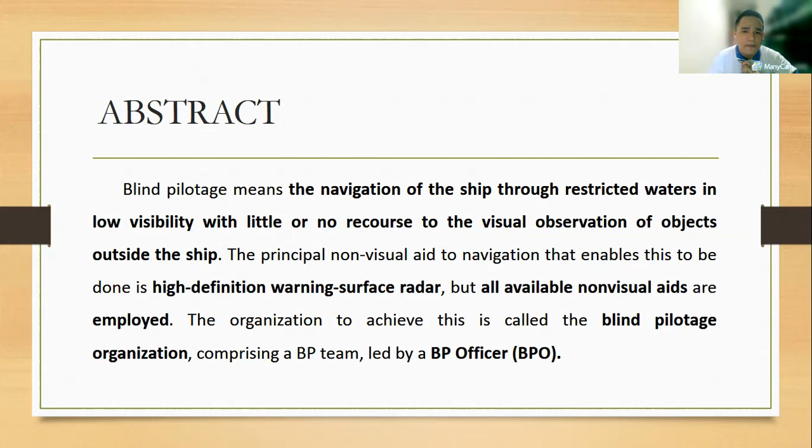Let's talk about the introduction of the topic. We're going to discuss the assessment, parallel index techniques, radar clearing ranges, course alterations, responsibilities, conduct of blind pilotage, and the blind pilotage team and duties.

After that, we're going to discuss the planning and execution of blind pilotage, which covers the principles, planning, execution, blind anchorages, navigational records, and horizontal displays.

Let's talk about the assessment of the risk involved in a blind pilotage passage. Although normally the accuracy of blind pilotage is such that a ship can be taken to an open anchorage and anchored within 50 yards of the desired place, the degree of risk involved, particularly in restricted waters, must be carefully assessed—due to congestion from shipping, or failure of radar or other vital aids.

Once the ship has been committed to her passage, the number and quality of fixing marks must be taken into account. The next topic is the parallel index technique.

This technique is the key to blind pilotage. The running of a parallel index line provides real-time information on the ship's lateral position relative to the planned track. On the chart in figure 1, as you can see on the right side, a line is drawn from the edge of a radar, like this one.

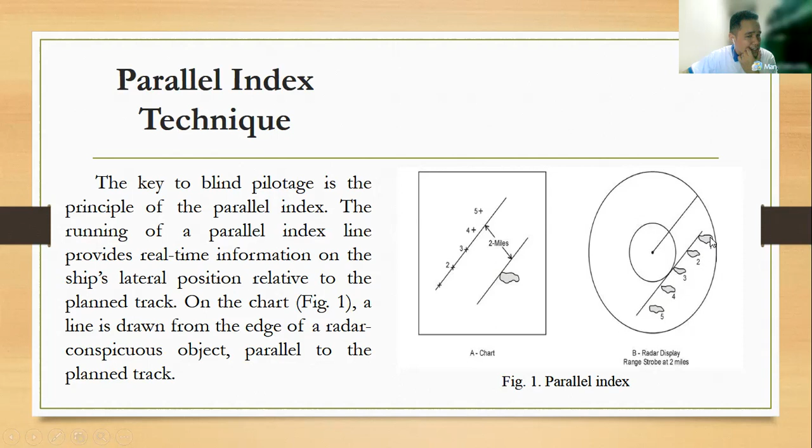It is drawn from the edge of a radar-conspicuous object, like this. This is object 1, 2, 3, 4, 5, as the ship is moving, parallel to the planned track.

The perpendicular distance, or cross index range, from the object to the track is then measured. The range strobe on the radar is set to this range, and a solid chinagraph line is drawn on the display parallel to the planned course, on a scale appropriate to the range used.

Positions 1, 2, and 3 on the chart and radar display show the ship on track at various instances over time. This is not a number of different targets—it is only one target, but it appears to move due to the time constraint.

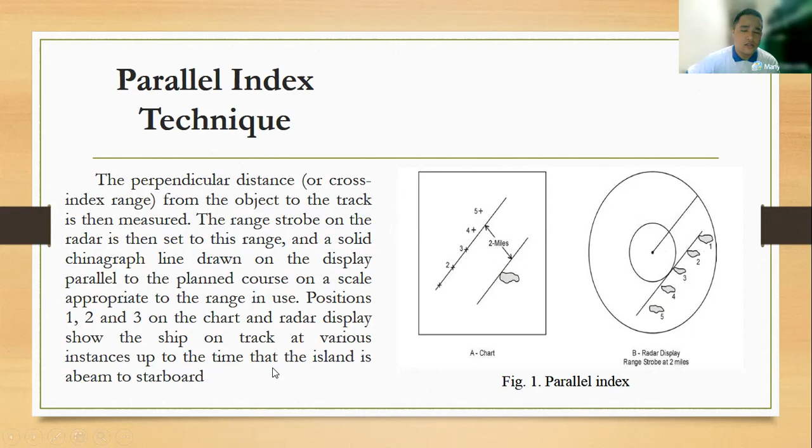This continues up to the time that the island is abeam to the starboard. Positions 4 and 5 show the ship off the track, to port.

The exact distance off track can be measured by dividers from the radar echo of the island to the nearest point of the chinagraph index line, at the scale of the display. This can be made easier by constructing scales for each range setting, as shown below, and mounting them adjacent to the display. The crosses on the chart do not represent fixes and only appear to illustrate the example.

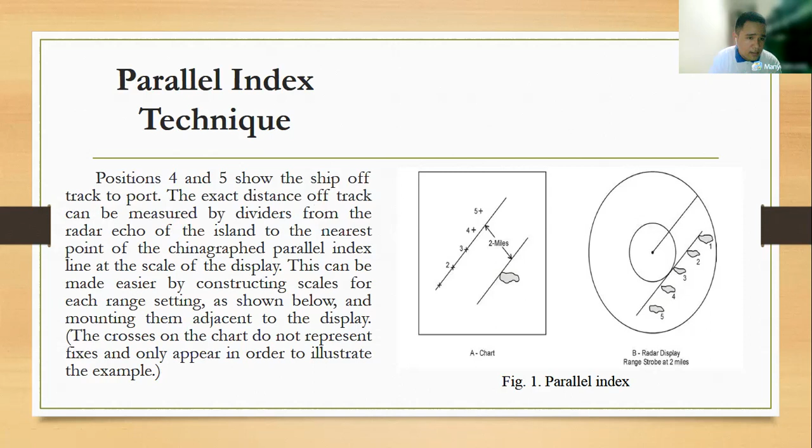The next topic is radar clearing ranges, as shown in figure 2. These are similarly drawn to the maximum or minimum distances from radar-conspicuous objects to keep the ship clear of dangers. These are drawn as broken lines.

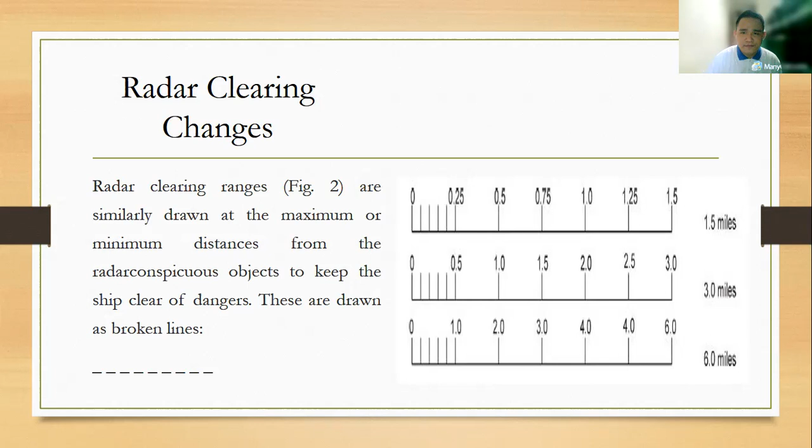The next topic is course alteration. For the next topic, we're going to talk about course alteration. Next slide, please.

So, course alteration: wheel-over positions are calculated and plotted on the chart as for visual pilotage. A radar-conspicuous mark is selected as close as possible to the wheel-over position. A broken line is then drawn through the wheel-over position, parallel to the new course, and the cross index range measured. This wheel-over range is plotted on the display as a broken line, parallel to the new course. When the selected mark reaches this line, the wheel should be put over and the ship brought round to the new course, by which time the mark should be on the firm line denoting the parallel index for the new course.

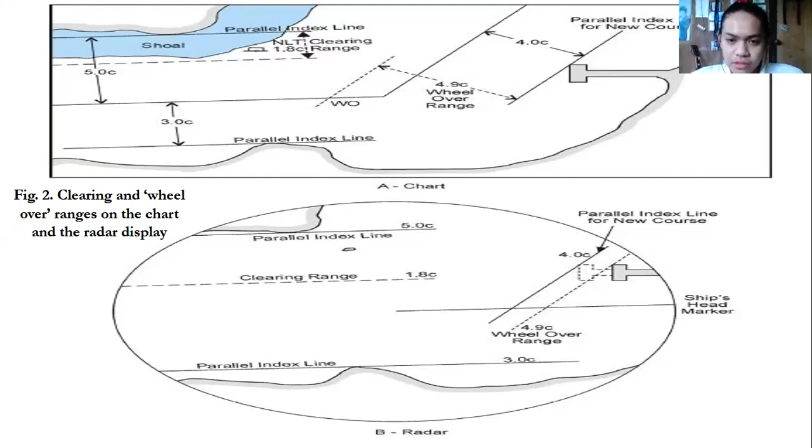Next is responsibilities. In normal circumstances, the navigating officer is the pilot of the ship, although if he is not a navigation subspecialist, the duty of pilotage devolves on the captain, who may either perform it himself or, at his discretion, depute any officer of the ship's complement to do so. No matter what the blind pilotage organization may be, the subspecialist navigating officer, or NO, is always the pilot of the ship, and thus he should be the blind pilotage officer, or BPO, where no navigating subspecialist is borne. The officer appointed for navigating should also be the blind pilotage officer in normal circumstances.

However, as responsibility for pilotage is clearly vested in the captain, he may wish to delegate the blind pilotage duty to some other officer. If so, the captain must also clearly set out in his standing orders the circumstances envisaged, to ensure it is absolutely clear who is responsible and when.

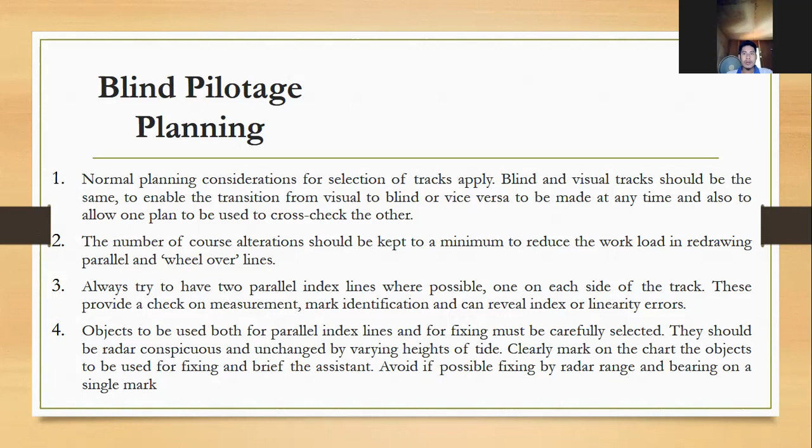The range scales to be used require careful consideration. Accuracy is greater at shorter ranges, but marks pass more quickly than at a distance, requiring more lines to be drawn. When operating on short-range scales, it is essential that the BPO frequently switches to longer ranges to keep aware of developing situations. Changes of range scales and parallel index marks should be pre-planned and marked in the notebook. The stage at which charts will be changed must also be carefully considered.

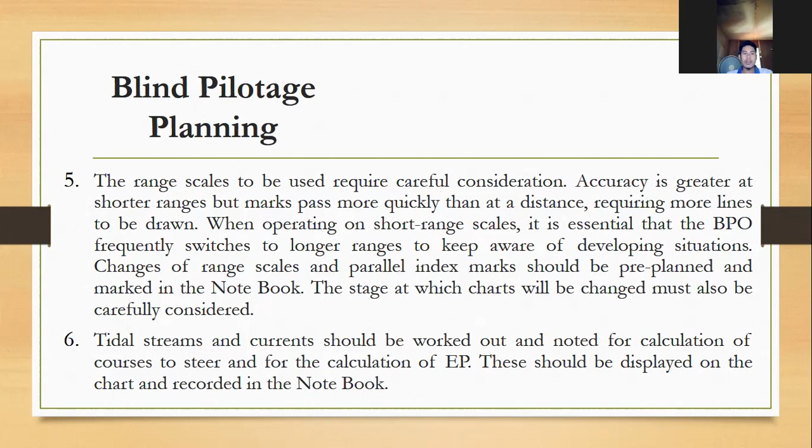Number 6, tidal streams and currents should be worked out and noted for calculation of courses to steer and for calculation of EP. This should be displayed on the chart and recorded in the notebook.

Number 7, expected soundings, allowing for height of tide and calibration of echo sounder, should be noted for each leg. The possibility of being early or late should also be borne in mind. Number 8, all hazards along the track should be boxed in.

Number 9, details of all lights and fog signals should be taken from the Admiralty List of Lights and chart and entered in the notebook. The chart: number 10, the chart should be drawn up using standard symbols, as seen in table 2.

Blind pilotage chart work. In parallel index lines, to stay on track, the symbol must be a solid line. In clearing ranges, the symbol is a broken line. In wheel over ranges, the symbol is dotted.

Next slide. The term dead range in figure 4 and 5 is used to describe the range of a mark ahead when anchoring in a chosen position. The term may also be used when measuring the progress of a radar conspicuous object along a parallel line. As shown in figure 25, radar conspicuous objects such as buoys should be highlighted to enable the BPO to have a clear mental picture of what he expects to see on the display.

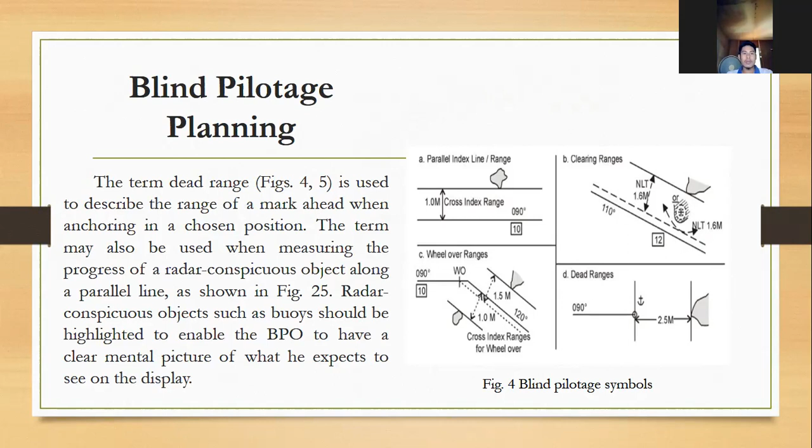Next. The notebook, 11. The notebook should contain the full plan, neatly and legibly recorded in chronological order. Sketches of both chart and radar display in figure 23 can be of great assistance to the BPO in evaluating the picture. A suitable notebook layout supplementing figure 23 is shown in figure 24 as a guide to blind pilotage planning.

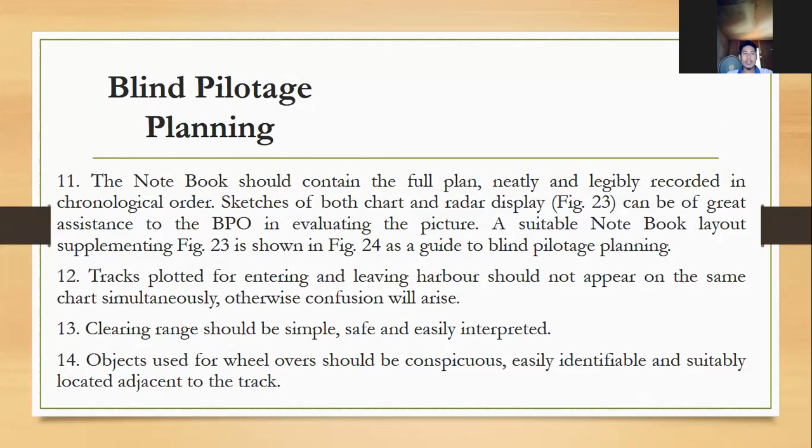Number 12, tracks plotted for entering and leaving harbor should not appear on the same chart simultaneously, otherwise confusion will arise. Number 13, clearing ranges should be simple, safe, and easily interpreted. Number 14, objects used for wheel over should be conspicuous, easily identifiable, and suitably located adjacent to the track. This illustration is preparation of the chart and displays for blind pilotage.

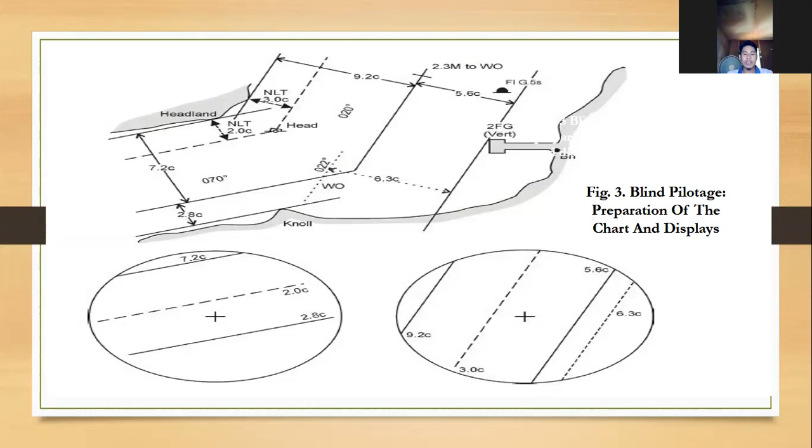Blind pilotage execution, to be reported by Paredes. So, blind pilotage execution. First is to carry out a time check to synchronize clocks and watches. Second, on the radar display, keep one set of parallel index lines drawn up ahead of those in use. Any more will clutter the display excessively; rub out lines as soon as they are finished with.

Third is identify contacts early by range and bearing from charted objects; an accurate EP is a most useful aid in identification. Fourth is to fix at frequent intervals and immediately after a change of course, DR EP ahead. A suitable fixing procedure: first, BPO assistant: standby fix in 1 minute. BPO: Roger, using points A, B, and C. BPO assistant writes this in the notebook.

Next slide, please. BPO assistant: fix now. BPO marks the point on the face of the display as BPO assistant notes the time. BPO then ranges off the marks drawn on the display and passes this to the BPO assistant. BPO assistant records the ranges, plots the fix, and generates fresh DR and EP. This procedure cuts the time to take a fix and reduces the risk of a cocked hat due to ship movement. It may be quicker to interpolate from the range rings rather than to use the range strobe, although the latter will be more accurate.

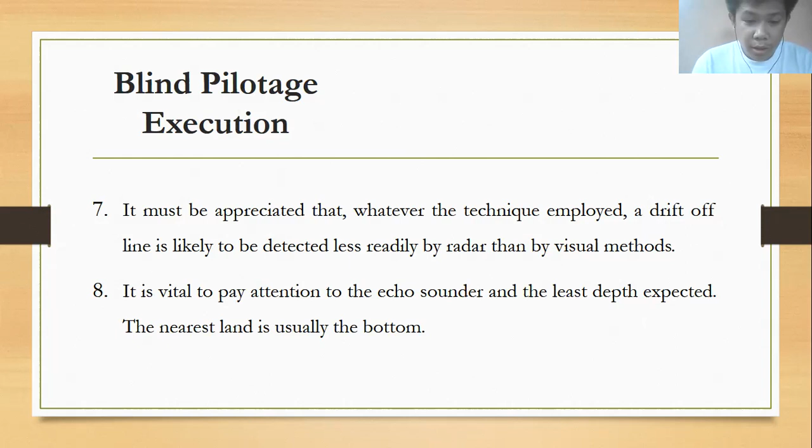Seventh is, it must be appreciated that whatever the technique employed, a drift off line is likely to be detected less readily by radar than by visual methods. And lastly, it is vital to pay attention to the echo sounder and the least depth expected, the nearest land is usually the bottom. So next slide.

So, blind pilotage exercise. In the blind pilotage exercise, to improve the reality of BP exercises in clear weather, the following points should not be forgotten. Safe speed should be maintained, fixes should be recorded and plotted at the same frequency as for actual blind pilotage. A full debrief should take place on completion of the practice. So next slide, please.

Blind anchorage. A blind anchorage should be planned in the same way as a visual anchorage, but remember to allow stem to radar instead of stem to standard when plotting the let-go position. As shown in figure 25, parallel index lines should be used to guide the ship to the anchorage position, and she must stay boxed in by clearing ranges.

Distances to run can be obtained by using a dead range on a suitable object ahead, or by measuring the progress of a radar conspicuous object along a parallel index line. Full details must be shown on the chart and in the notebook. Distances to run must be marked on the face of the display. Next slide.

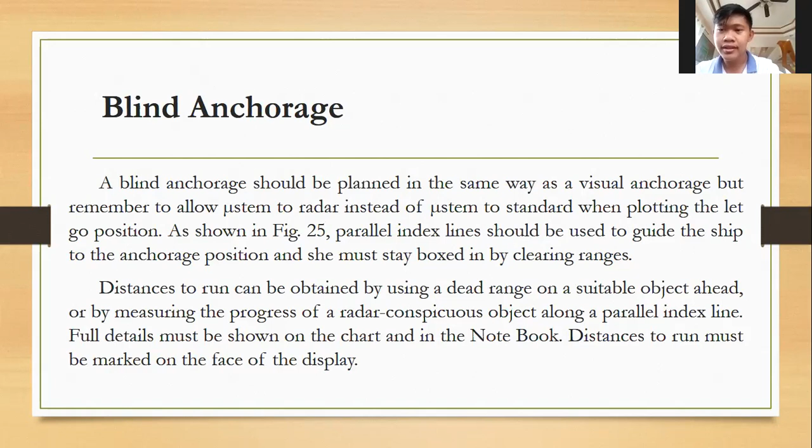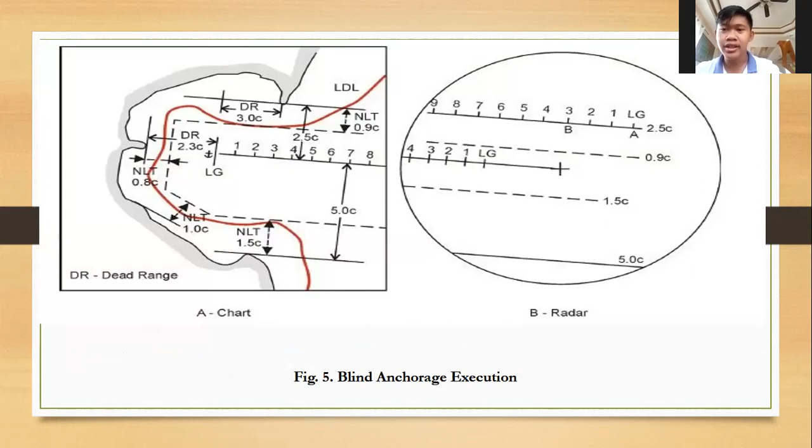This is figure 5, the blind anchorage execution. In part A is the chart, in part B is the radar. Next. Blind anchorage. This can be backed up by the range strobe, but reliance on the strobe alone is dangerous because the reference is lost as soon as the strobe is required for any other measurement.

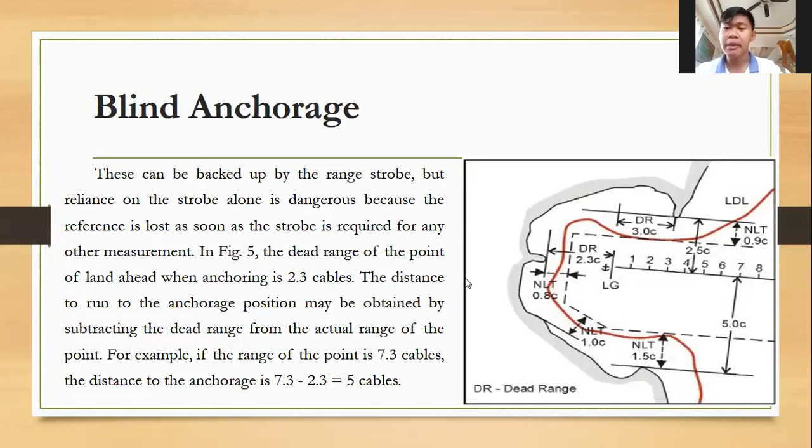In figure 5, the dead range of the point of land ahead when anchoring is 2.3 cables. The distance to run to the anchorage position may be obtained by subtracting the dead range from the actual range of the point. For example, if the range of the point is 7.3 cables, the distance to the anchorage is 7.3 minus 2.3, which is equal to 5 cables. Next.

Figure 2 also shows that the dead range of the point of land on the starboard side when anchoring is 3 cables. On the radar display, this point of land should move along the parallel index line drawn 2.5 cables to starboard of the approach track. When the ship reaches the let-go position, the point of land should have reached point A, 3 cables beyond the abeam position B. The distance AB equals the dead range, 3 cables. Next slide.

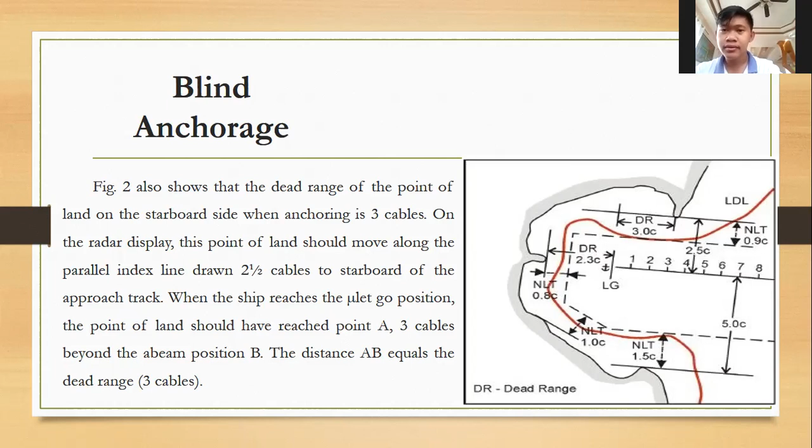Navigational records. When carrying out a blind pilotage passage, the navigating officer or BPO will be too busy to maintain a continuous written record. It is essential that such a record should be kept, and in comparatively unrestricted waters, it is normally sufficient for this record to be kept on the chart itself by plotting fixes and noting the positions and times of alterations of course and speed and other relevant data, in addition to the record in the navigational record book.

This procedure, involving thorough and methodical chart work, is in fact no different from that which should be practiced during any piloted passage in more restricted conditions. However, the navigating officer or BPO's running commentary to the captain should be recorded on tape if possible. For example, number 7 buoy fine on port bow, 8 cables, ship 50 yards to port of track, steer 136 to regain. In conjunction with the navigating officer or BPO's prepared notebook, the chart, the recorded fixes, courses and speed, this record should suffice for any subsequent analysis required.